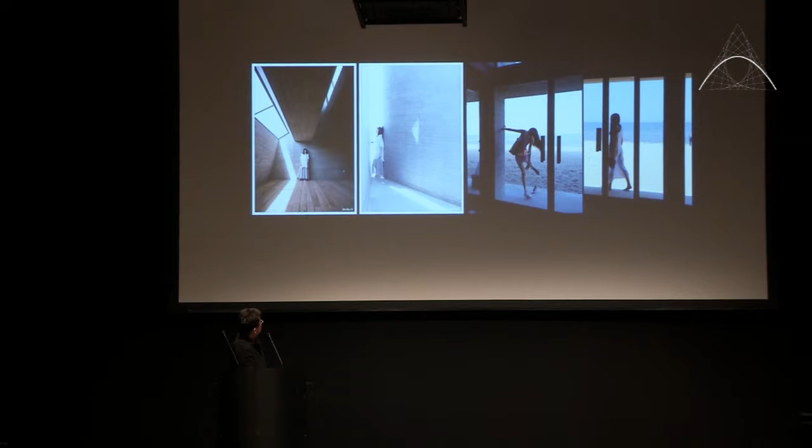Sleepers, children, construction workers nearby, girls, friends, lovers.

Well, celebrities. This guy at the bottom is my idol — he's been the most influential Chinese rock star for the last 30 years. And the man next to him is the director of the library.

Awkward people with awkward shots, even more awkward. Different kinds of activities — public lectures, group discussions, and so forth.

Travelers. I guess this is a group of colleagues going there on their graduation day, taking pictures.

This really has been an intriguing experience for me, to see such a small space generate such an amount of social energy and social response. It's quite an intriguing experience.

That makes me think — even though our life is more and more digitized, becoming more and more unreal because of the computer, because of the internet, I think this kind of real, physical space still matters to regular people's lives. I think that's a good thing to know as an architect.

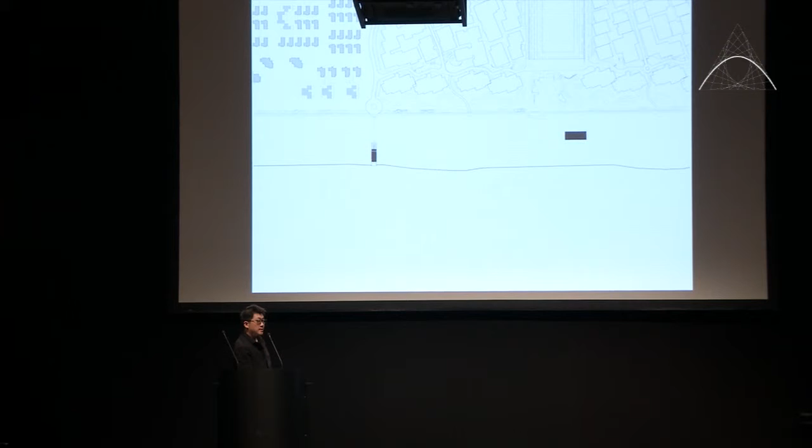A closer look at the community and the small county nearby. This is the relationship between the library and the residential compound behind it, and this is the master plan for the future of the residential compound. You can see there will be full residential housing behind the library, so it's really a community public program.

The first day I went to the site, I got up early because I tried to look at the sunrise over the ocean, but unfortunately it was an overcast day. But standing in that kind of environment, facing this vast ocean, you almost feel the pressure from nature. Nature is always beautiful, but when you stand in this kind of nature, you almost feel a kind of unsafe psychologically. Some objects were quite inspiring, scattered around the site.

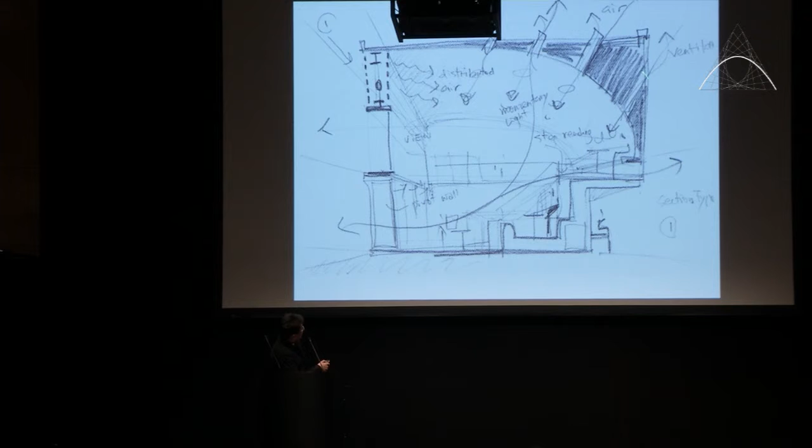The ocean actually is to the east side of the building. So as you can see, the east facade is kind of transparent because we want to allow people to look at the sea, the landscape. But on the west side, it's more solid, visually isolating the space from the future expansion of the community. And this direction has been reinforced by the curve on the roof.

We actually leave a slice of horizontal window underneath the bench of the curve, and this window is operable, because we want to accelerate the air ventilation inside the space. This building has no air conditioning at all, so the passive airflow is very important to achieve the comfort inside the space, especially for the summertime.

So as you can see on the roof, we have a matrix of ventilation tunnels covered by the sky windows, which is also operable. So we actually create a kind of cross ventilation inside the space.

The floor has 3 steps because we want to allow an unblocked view for the regular readers in the space. Because of the height difference, people won't block each other. They can look straight to the landscape.

And on this part, we actually design a row of pivot doors, which can rotate to open when the weather allows. Especially in the summertime, this works pretty well to invite the maximum air to flow into the space.

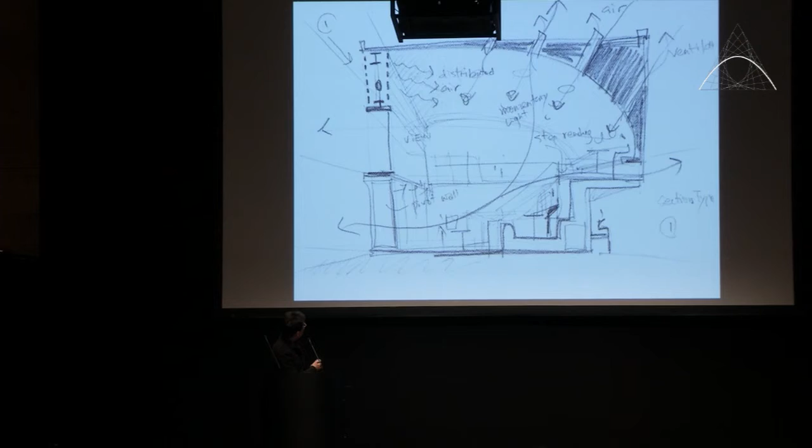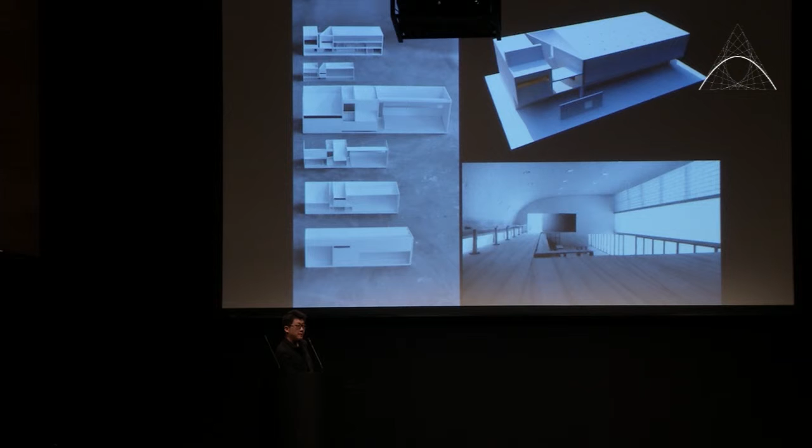Model studies. We use large-scale models to testify the lighting condition. I think this works 10 times better than the computer rendering for us. Sectional model.

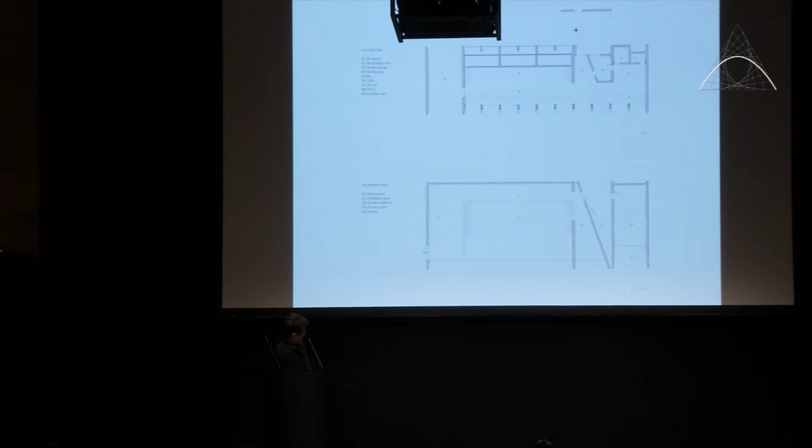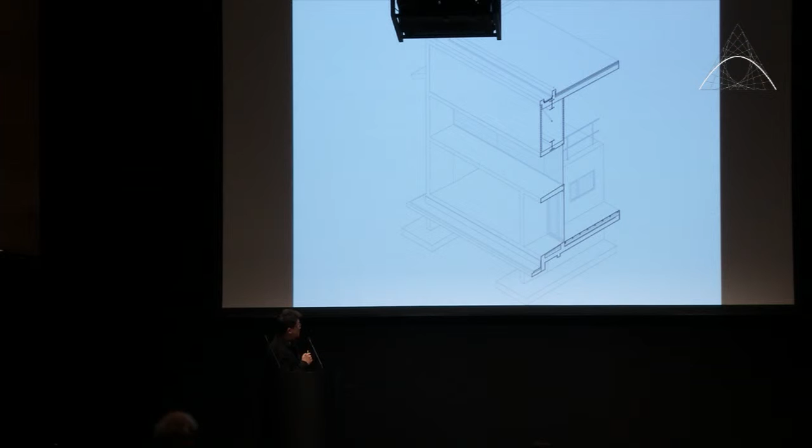In order to achieve that, we have to use a sort of truss system on top of it to support a roof, because the roof has to span 20 meters in this place. But we don't want to expose the truss because that looks a little bit over-industrial. So we put 2 layers of glass brick wall on both sides to blur the truss visually. And this is translucent, so the translucency will also cast a very unique light ambience for the interior space.

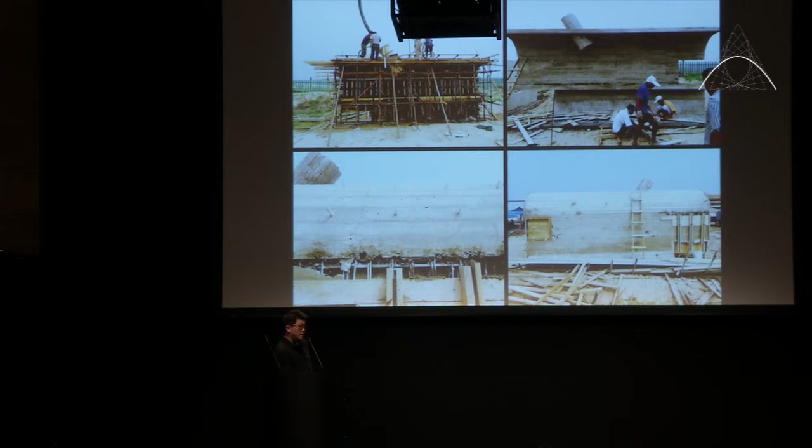Construction phase. This is the first mock-up wall. It's a failure, as you can tell. This team has zero experience to work on this kind of project with exposed concrete, so they just have to learn.

We made 3 mock-up walls, and the final piece is good enough for the main building. This is the chart for all the ingredients that we made for the concrete. So if any architects in this room need this ingredients chart, I can provide it for free.

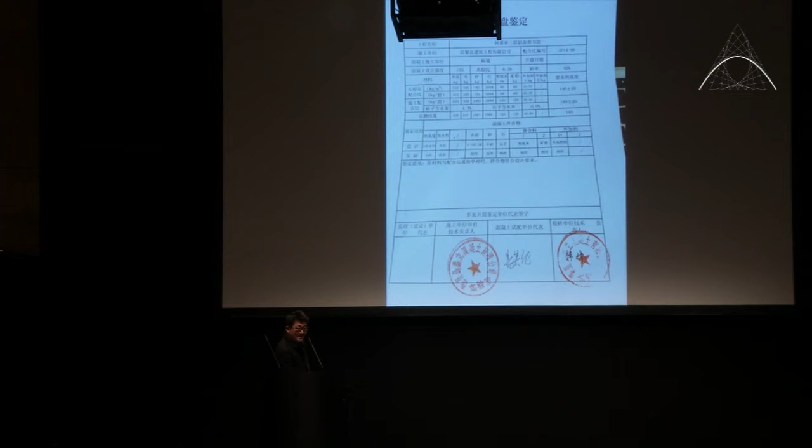Foundations. Ruts for pouring the concrete. Very careful treatment for the formwork.

We use wood as the main material for the formwork. So this material is kind of alive. It can shrink and expand because of the different humidity and temperature. So the material has to be very carefully treated through the construction process. You can see we always have to brush it with water and also have to provide shading on the site.

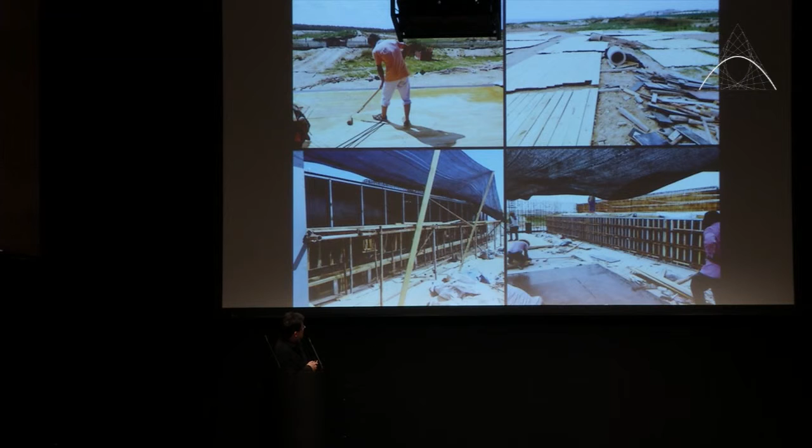Installation of the formwork. This is just like the section drawing I just showed you, the sketch.

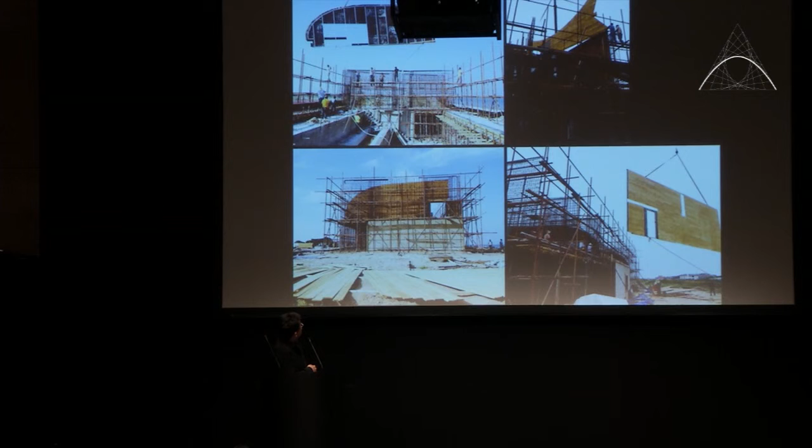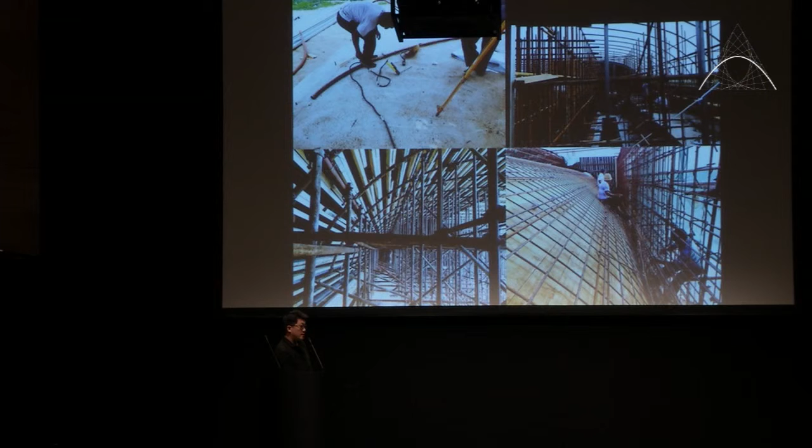This is when they try to make the curved roof. They have to bend the steel rod on the ground. This is the most accurate way to keep the shape as accurate as possible. Then they put this rod to the right place of the building and cast the concrete. So in this way, the curve will be consistent with the design requirement.

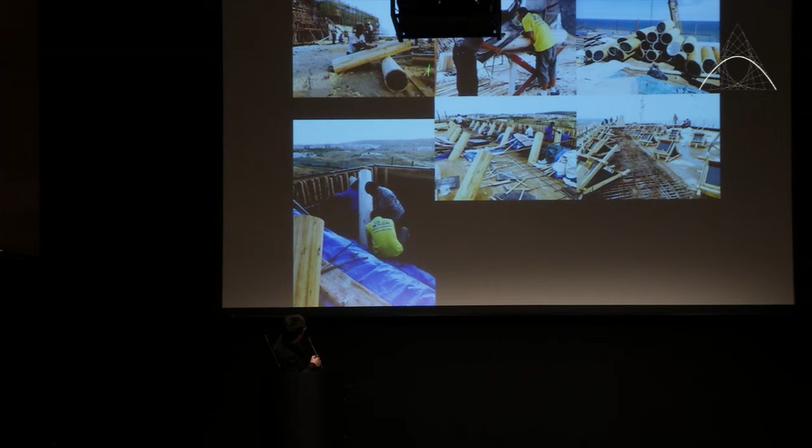Same logic when they do the ventilation tunnel: formwork on the ground, then they put it on the building and pour the concrete.

This is a construction team from the same county.

Okay, so the last part, I just show you a series of pictures about the final status of the building. The west facade, east, the north, entrance.

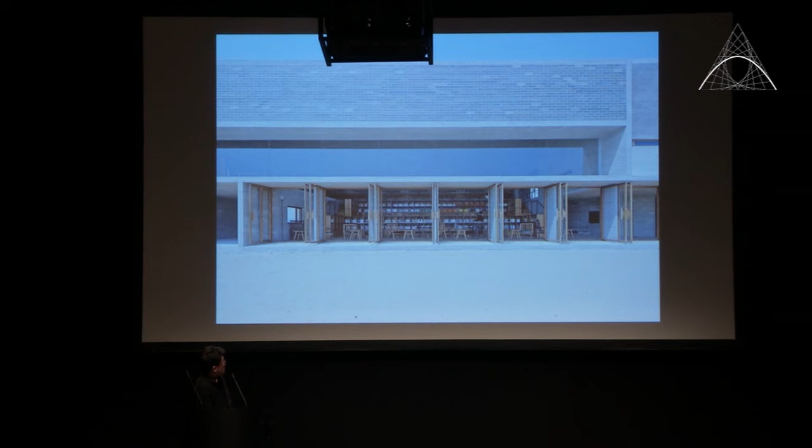This is the condition when all the pivot doors rotate to open. Lighting from inside.

That's the main space. That's when the light can penetrate in the afternoon time.

The wind tunnel, actually the ventilation tunnel, also works as the light well. So during the afternoon time, when the sun gets to the right angle, the light will penetrate into the space to cast the circular spot. But it will disappear very fast because the tunnel is kind of deep.

That's the roof, the matrix of this ventilation tunnel. That's when all the sky windows are open for the ventilation. View to the ocean.

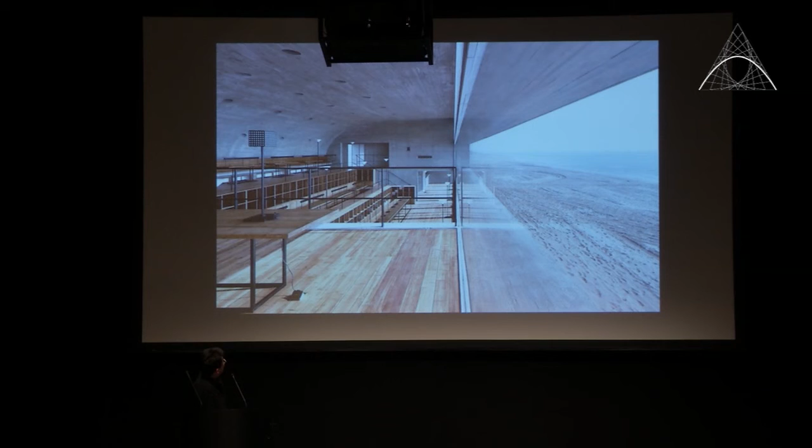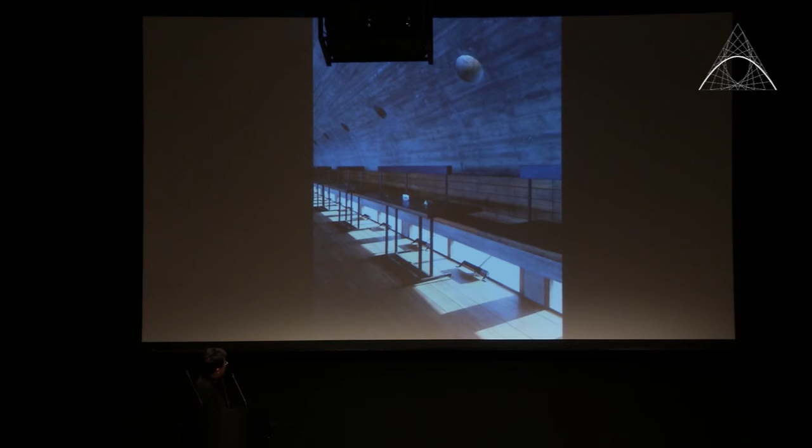This picture shows you the condition when the sun almost goes down to sunset time. So the light is very parallel to the ground. The light is able to slice into the space underneath the bench through this small gap to cast a very long shadow. It's almost like a zero-degree shadow.

See this? That's actually why we picked light as the very important theme of this design, because the lighting environment of this site is very primitive. It's very different than the urban condition.

This is when you stay in the activity room and look back to the main room, reading space, activity room.

Two sky windows facing, one is east, one is west. So at some moment of the day, you can see different colors cast by the light because of the direction of the light.